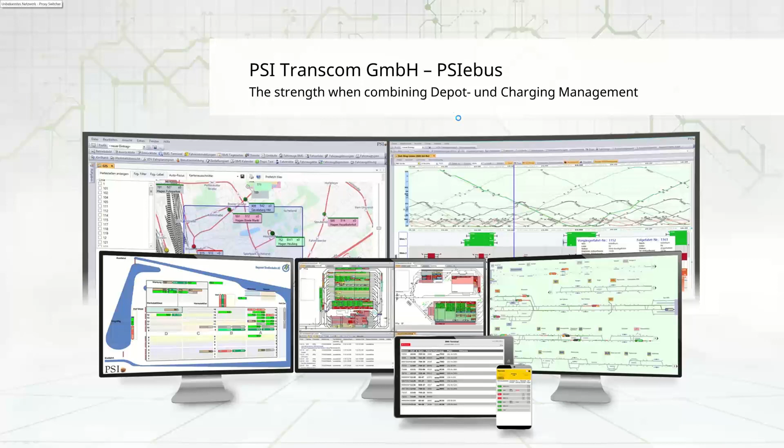Let me introduce our company. Our mother company is PSI Software AG, a large corporation with 2,000 employees around the world, doing 200 million euros in turnover. We are listed on the German stock exchange, with offices all around the world. PSI Software mainly does control software for all kinds of industries. PSI is active in the mining industry, in managing gas, oil, and water networks, in the logistics industry, and in the automotive industry, so there are several applications using PSI software.

So what are we doing? We have our unique software platform called PSI Traffic. PSI Traffic is a modular software that has a lot of applications and can be configured just according to your needs.

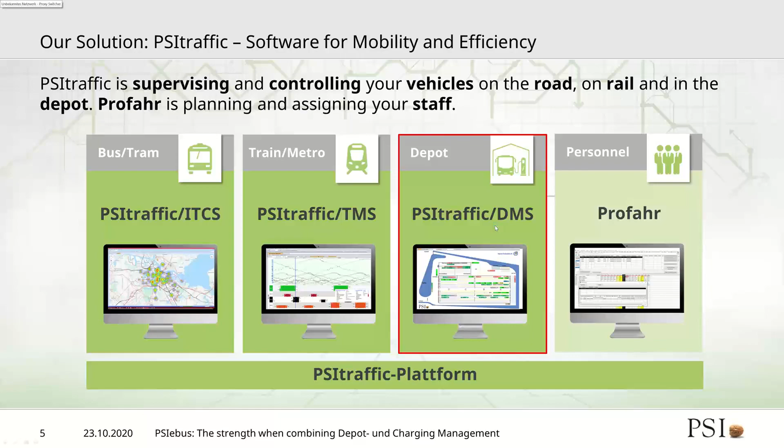So a depot management system - why should you think about one? When I was traveling around and having meetings with several customers, I noticed these wonderful applications, and all of the customers were telling me, hey Eric, we already have a depot management system. So I'm quite confident you will recognize these nice tools, which could be called a DMS.

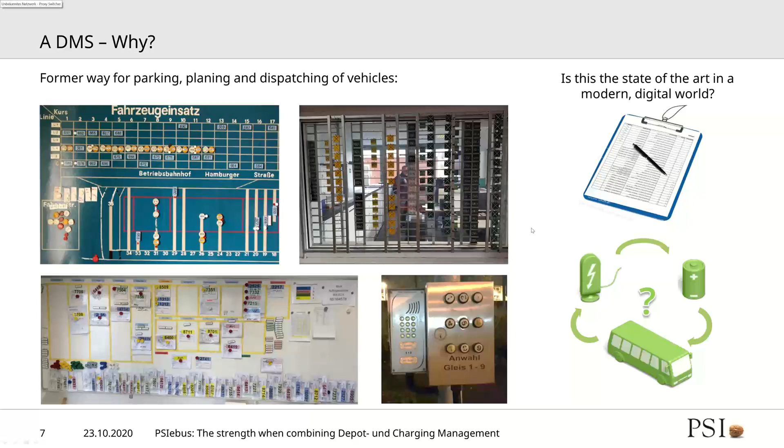One customer was also proud of having a three-dimensional DMS like these magnetic flip charts, but is this state of the art in a modern digital world? And furthermore, how does this cope with electrical buses when you have to consider state of charging and different constraints of these new technologies? So I think you'll agree with me that this is reason enough to think about a modern IT tool which will support you better in your operation.

But a depot management system is not only dedicated for electrical buses. It has several more applications to support and manage your depot operations already right now.

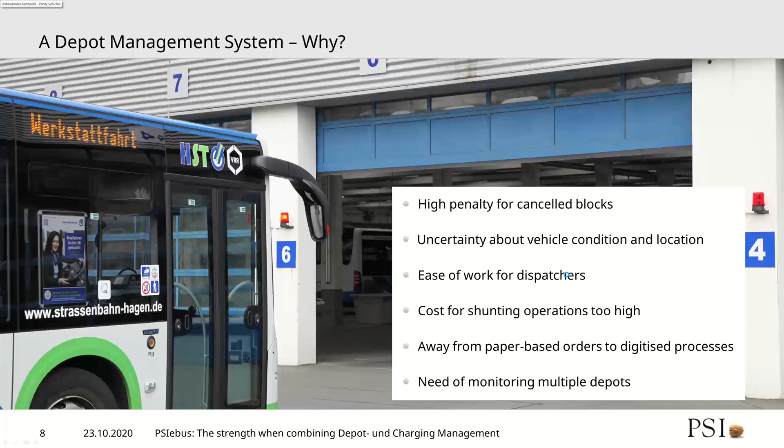So when you have a lot of constraints or problems managing your depot operation - for example too much shunting, too much paperwork, having to monitor multiple depots, or even high penalties paid when blocks are cancelled. If you need more transparency and flexibility across all your depot processes, or maybe you have a shortage of resources - all these questions lead you to the answer: you might think about a depot management system, which could help you become more efficient and better with your depot operations.

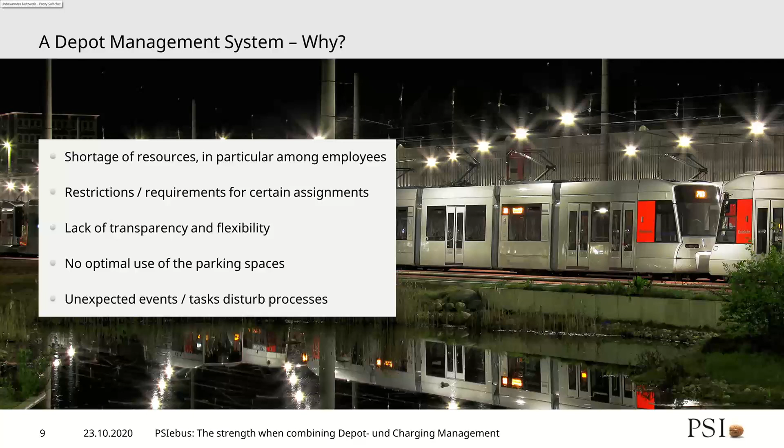How can we do it? So what are the modules and functionalities of a depot management system? The depot management system covers all the processes and all the functionalities you have in your depot.

So the DMS starts to track and recognize the vehicle when it's entering the depot. We start with vehicle identification, the assignment of parking lots. We manage workshop and resupply processes. Definitely the heart of the software is the allocation to blocks, so the dispatching. We have quality management, to report statistics etc. We inform the driver. We include the charging management, which I'll talk about later on. And our software is cloud capable, so it's up to you whether it runs on premise or in the cloud - both ways are possible.

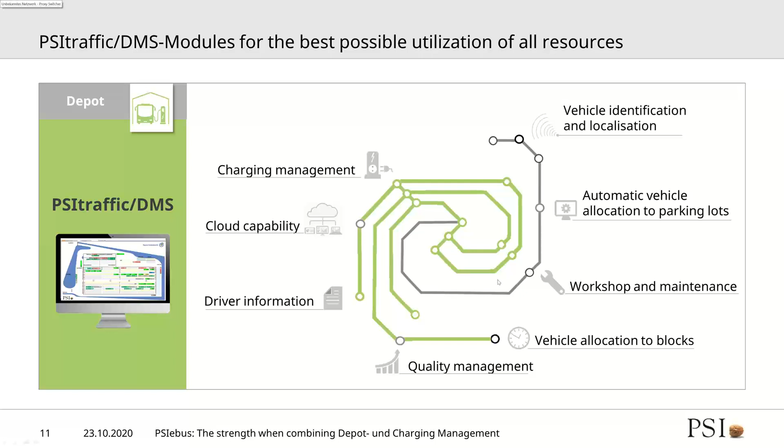Starting with the first function or module of our DMS: vehicle identification. The vehicle identification can be done via various technologies. As a software company, we are open to using different hardware or other systems to fulfill these functionalities. The idea with a vehicle identification system is to have precise and exact information about which vehicle is approaching the depot and where vehicles are parked.

Furthermore, we can use this technology for data communication with the buses - to download diagnostic information from the bus, and to control or trigger preconditioning, meaning switching on the heating or cooling systems automatically. It also helps you have a graphic overview of all the vehicles, broadcasted to all your users. On the bottom right, you see an example we analyzed together with a customer - the advantages of using a positioning system to get a more precise overview of where your vehicles are parked in your yard.

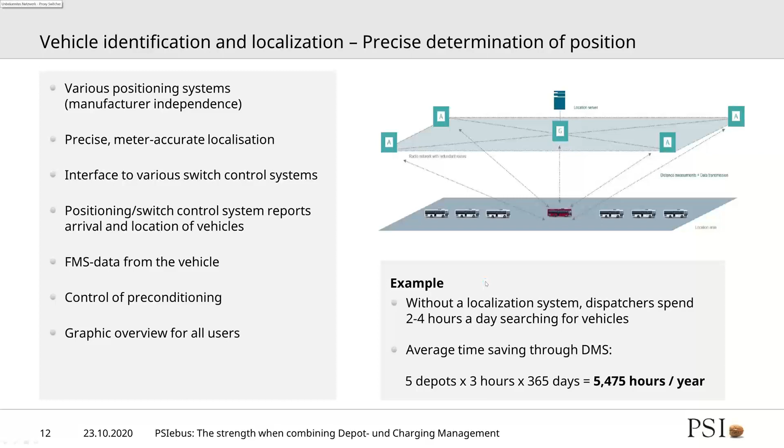So when we know the vehicle which is approaching the depot and we have recognized the number of the bus, our system starts the logic in order to assign the right parking lot to the vehicle, which means for the electrical buses also to decide which charging station this bus should use.

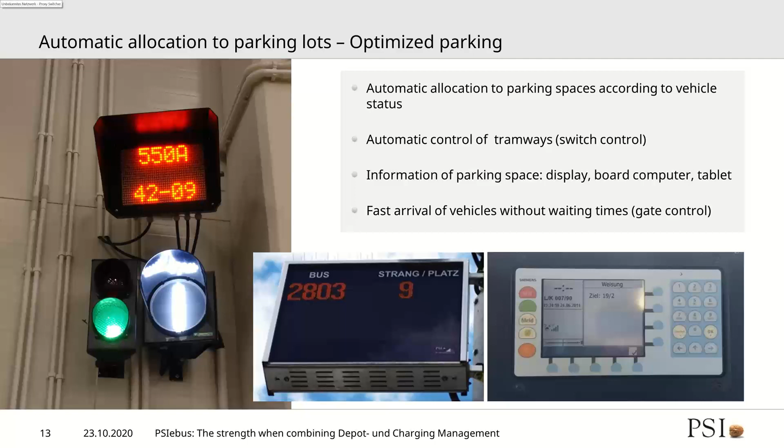There are different technologies to inform the driver about its parking position. We can use exterior displays like this, or if we have communication to the HMI of the driver, we can display it there to show the driver, okay, you have to park your bus on spot number 9. This enables the bus driver to directly enter the depot. There's no need to wait at the gate to do checks with managers. The driver automatically knows where he should park the vehicle best.

The next functionality or module of our software is the integration of workshop tasks. This helps you have efficient planning of the operation. If you have a complete overview in the DMS of the cycle-based upcoming checkups of your vehicles, and an import of the reported failures and defects of the vehicle, it helps you and your workshop staff have a clear overview about which vehicle has which defect, where the vehicle is parked.

Furthermore, the dispatcher will know which vehicle is down for workshop repairs and not available for dispatching. By integrating these functionalities together, both sides, dispatching and workshop, have the same overview, the same information out of the system, knowing which vehicle is available or which vehicle is down due to defects.

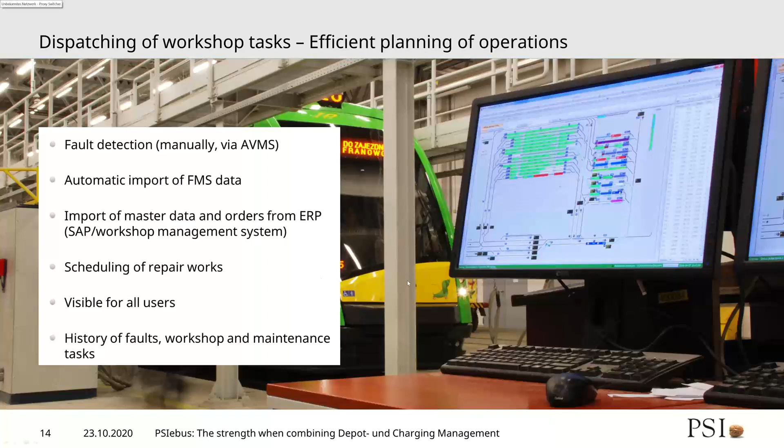So what we are doing with maintenance and repair tasks, we do the same with all resupply tasks. We have software logic implemented to optimize the refueling schemes of your buses. When we consider the current tank status of the vehicles, we can assign vehicles best to the next block.

So in order to find a logic where there's no need to refuel each bus every day, the system can help you refuel buses maybe only every second or every third day. Furthermore, we can establish interfaces to the charge management, and provide special terminals to manage the resupply tasks done by your service staff, etc.

And when you know already in advance in your system that a vehicle needs cleaning, refueling, etc., these tasks can be marked so the dispatcher knows when a vehicle is not available for the next block because intensive cleaning or washing is necessary, and the vehicle won't be available for the next hours.

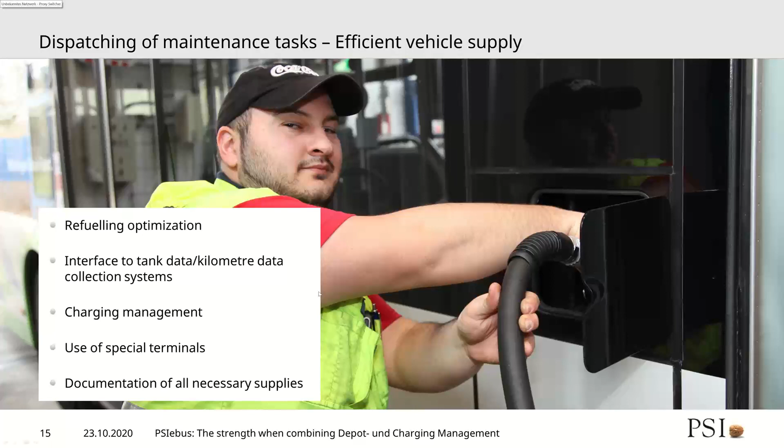As I mentioned at the beginning, the central or core functionality of our software is definitely the dispatching, meaning the automatic block assignment. Our system uses the Qualicision optimization kernel with artificial intelligence, which is a unique software kernel used by all PSI software. This software has the strength to consider a lot of criteria and a lot of constraints.

It can do a multi-criterial optimization to find the solution. The logic is fast, so it will always find a solution within seconds. There's no need to wait minutes or hours for a new dispatching result. It comes quickly out of the system whenever you trigger it.

The system is prepared to do all these things fully automatically, in order to support the dispatcher best and make their work much easier, just by helping with automatic redispatching, in case there are some cases that cause interruptions to your operation.

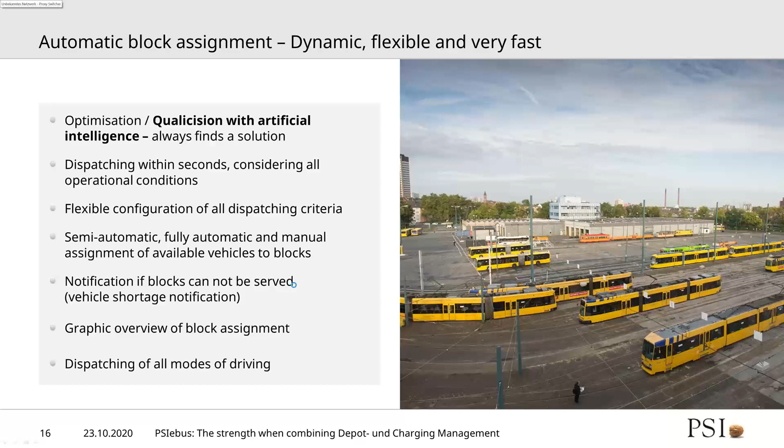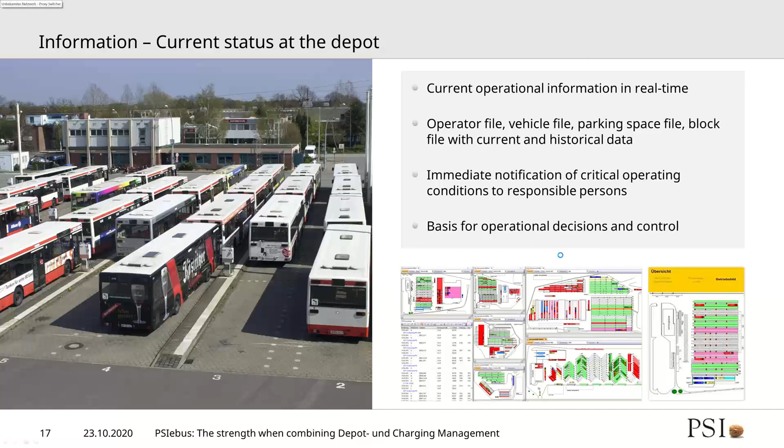Finally, when we have all this information in our system, the most important part is to inform the drivers. So we have a driver information screen, which can be shown on a normal TFT screen, or you could use it in our app on a tablet or mobile phone.

The idea is to inform the driver when he or she signs in, so the driver gets information: what is the trip I'm assigned to? When do I have to leave the depot? What is the assigned trip number I have to do? What is my duty? Where do I have to drive to? And especially, which vehicle have I to take?

Which vehicle was dispatched by the system automatically to me, and where is the vehicle parked? So the driver has all the information he needs when signing in with his duty and can immediately go to the noted spot, pick up the vehicle, and start his journey quickly and easily.

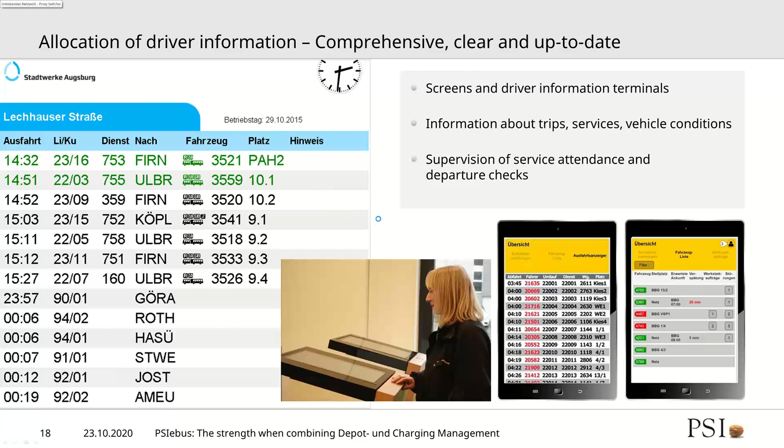So how can our system integrate with your existing and current IT landscape? Our strength is that we create interfaces to all your existing systems, so there's no need to replace all your IT infrastructure with a PSI software.

Our approach is that we integrate and create the necessary interfaces in order to make the best out of your existing system. So it's definitely the planning systems for the timetable and duty rostering. We could have interfaces to different ERP systems, AVL systems, gate control systems, and so on. It's project dependent which interfaces make sense and which systems you might have in use already.

Finally, what are the benefits of using a DMS? It definitely helps you to increase vehicle availability, have transparency of all the processes and transparency to all the users using the system, and cut down the costs of fueling processes, reserve vehicles, etc. So finally, it optimizes the full management of your depot operation.

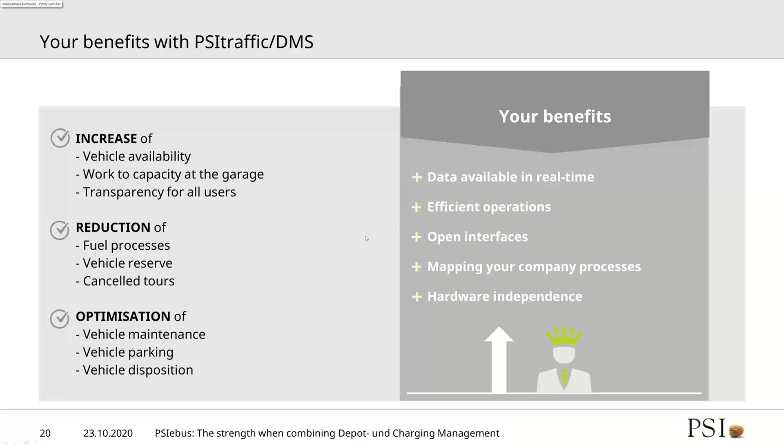Continuing with our upgrade of this solution towards electrical buses and electrical mobility, let's talk about our PSI eBus solution, which includes the charging management as well.

When talking about the combination of depot and charging management, I can talk about a very good reference we already have in place. We have realized, together with the operator in Hamburg, a large city in Germany—the operator is called Hamburger Hochbahn and is a long-standing customer to us—with intensive workshops, a pilot project to set up a full depot management system with a charging management system.

We combined it into one solution, and the system is running. It's been running in Hamburg now for almost 2 years. This is evidence that the things I'm talking about are not just an idea or theory, but practically already live in place.

So what was the starting point to start this discussion with Hamburg? It was a clear mission and strategy set by the mayor of Hamburg that as of 2020, Hamburg will procure only emission-free buses. This was a clear message from the politicians, which had to be realized by the transport operator Hochbahn. It was a huge challenge to have a mixed fleet moving away from just diesel vehicles.

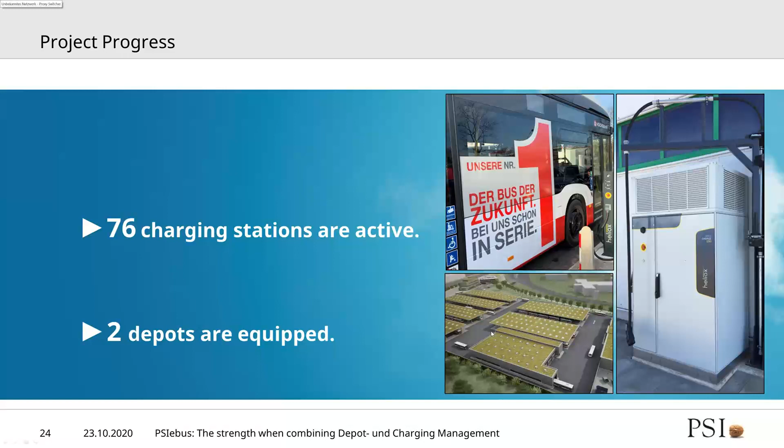At the moment, 76 charging stations are active, and 2 depots are equipped. Hamburg built a totally new depot, which you can see here—a brand new depot opened last year, dedicated only to electrical buses. You see different carports, and it's designed to house up to 240 electrical buses.

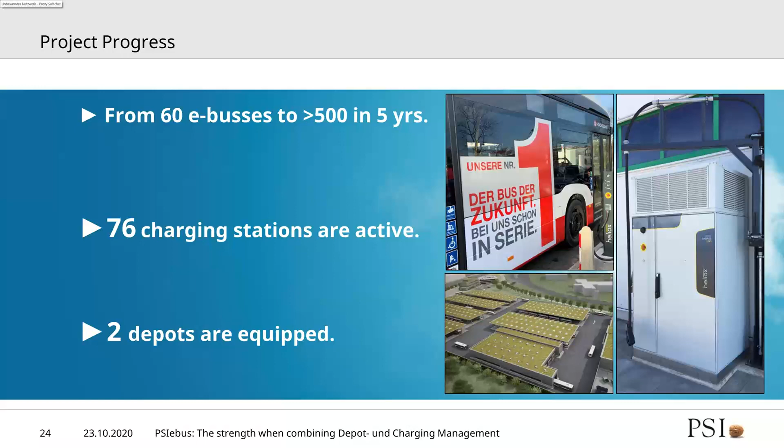Currently, Hamburg is operating 60 electrical buses. 500 are already procured and will be put into service within the next 5 years, and the remaining 500 vehicles will follow in the 5 years afterwards.

So what are the challenges when you are transforming your fleet from diesel buses to electric buses? I think the biggest challenge is the reduced range and mileage an electrical bus can drive.

Furthermore, you have to think about the management or a different organization of all your depot processes. In a diesel depot, the refueling and servicing is done at a point separate from the parking point. In an electrical depot, you have the resupply—meaning the charging—at the place where the bus is parked.

You have to think about how to park and assign the vehicle to the charging stations already when they're driving into the depot, because there's no need to move them around afterwards just for refueling, since they are standing at the charging station for hours.

Furthermore, charging takes a long time. Charging a bus takes more than 2 or 4 hours, depending on your chargers. You have to consider this significant time to refuel your buses. A diesel bus could be refueled within 5 to 10 minutes, the tank is full and the bus can start its journey. But this is not applicable anymore for electrical buses.

So what are the additional challenges when introducing electrical buses? You have to build up the charging infrastructure at the depot, which means some significant and severe construction works need to be undertaken.

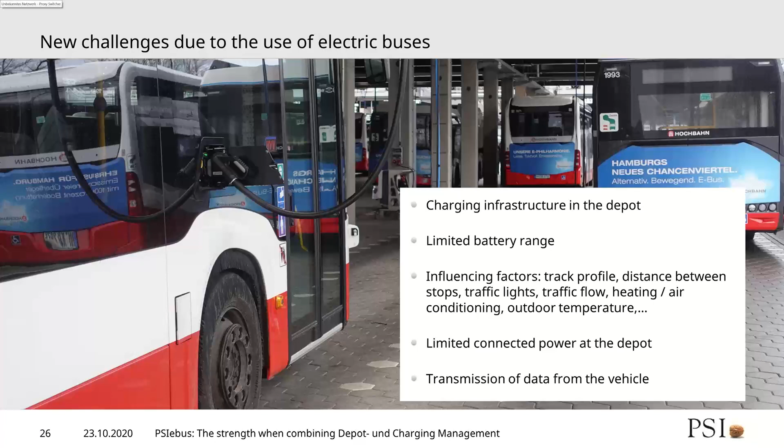So how is our PSI eBus solution working? We have two parts of the software. I start with the left part, which is the DMS. The DMS is continuously checking the status of the batteries, and it already considers all the necessary information to do automatic block dispatching and planning as described before.

The DMS is responsible for placing the vehicle at the right charging station, so it is responsible for parking management. It utilizes the charging stations best, with the necessary information needed when planning the parking and dispatching of the vehicle. Furthermore, the DMS triggers the preconditioning, meaning it can switch on the heating and cooling system of the buses fully automatically.

The DMS has an online interface to the smart charging system, which is a charge management system. The charging management system takes care of all the aspects coming from the electrical side, coming from the grid. It makes a forecast of the daily energy demand and considers constraints coming from the grid in order to best utilize your energy supply to charge the buses.

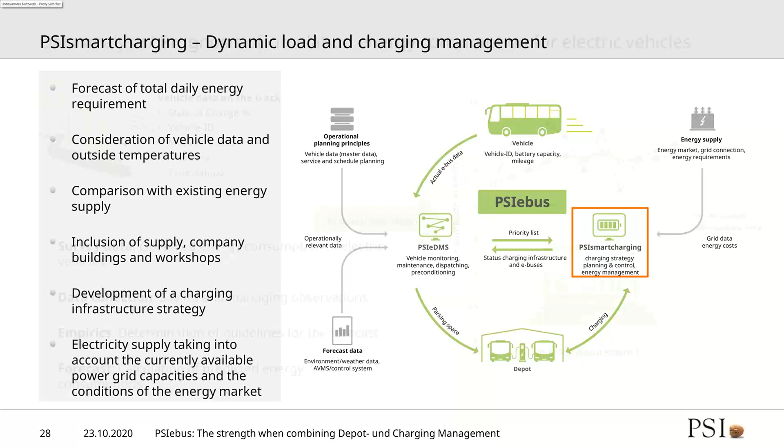I already mentioned there is a big need of data when managing the charging. Why is it so important to have a lot of data in our system? The idea behind it is that our dispatching algorithm is an artificial intelligence based optimization kernel, and it can predict the energy consumption of a bus. So we need data to take into account when predicting how much energy a bus will need for the next trip.

This is very important and helpful when you want to utilize your fleet best and make the most out of the electrical buses, knowing that if you use this bus on this trip with this outside temperature and these driving conditions, you get a forecast from the system of how much energy the bus will need. The charging management system will adjust the charging independently based on the forecast the DMS has done, so that the buses are charged only up to the amount of energy really needed for the next trip the bus will be assigned to.

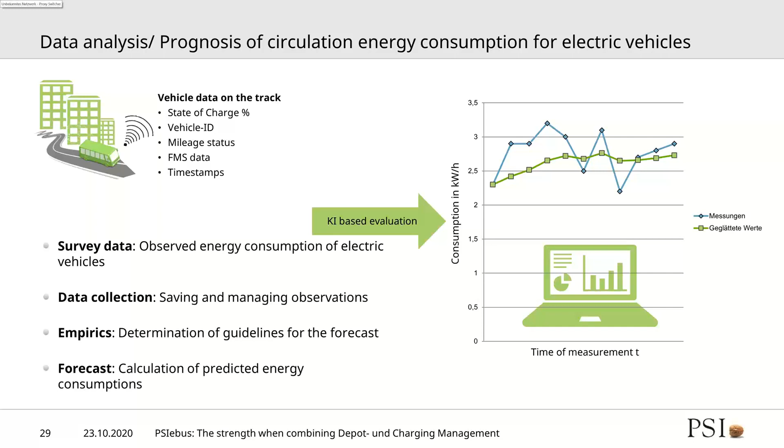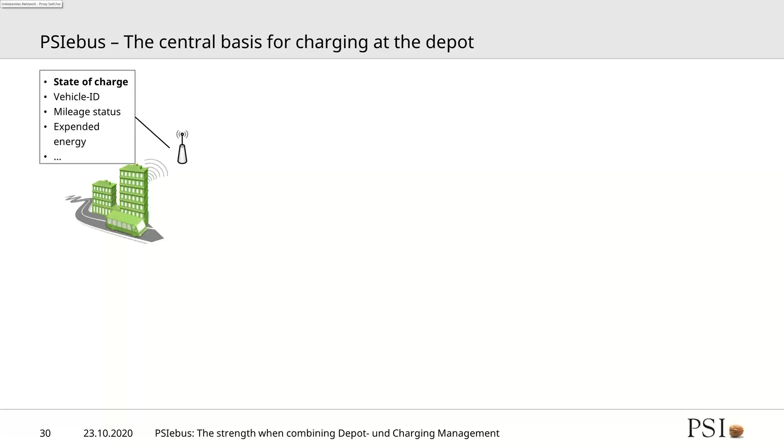So how is our PSI eBus system working? Assuming a bus is coming back from its journey, driving back to the depot, sending the needed data like state of charge somehow to a server. The DMS will have access to the server and will have the needed vehicle master data, so we know which is the manufacturer of the bus, how old it is, what type of battery it has, meaning what is the capacity of the battery, etc.

Furthermore, the DMS knows all the available blocks, meaning which trip has been served by the bus and what potential blocks the bus could be assigned to.

So taking this information into account, and having information about what is going on in the depot - is there a free charging station, and what type of chargers do you have. You could have slow chargers or fast charging stations. The DMS takes into account what charging station is available in order to make the selection and the parking assignment of the bus, informing the driver where to park and at which charging station.

Then the DMS creates a charging plan. You can call it also a charging strategy or a list of priority - which buses need to be charged first, or in which order the buses need to be charged, what is the needed energy demand of the buses, etc.

All this is transferred via an online interface to the smart charging system. The smart charging system observes the grid - knowing the available amount of energy at the grid, the cost of the energy, and other restrictions. We could have interfaces to your transformers on your depot to consider what amount of energy is really available.

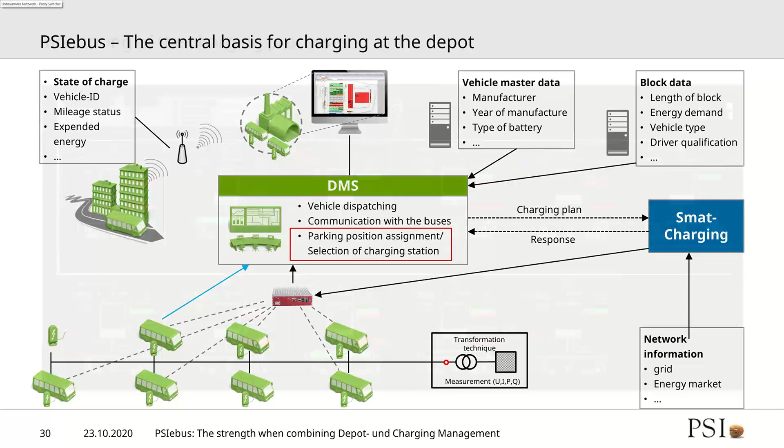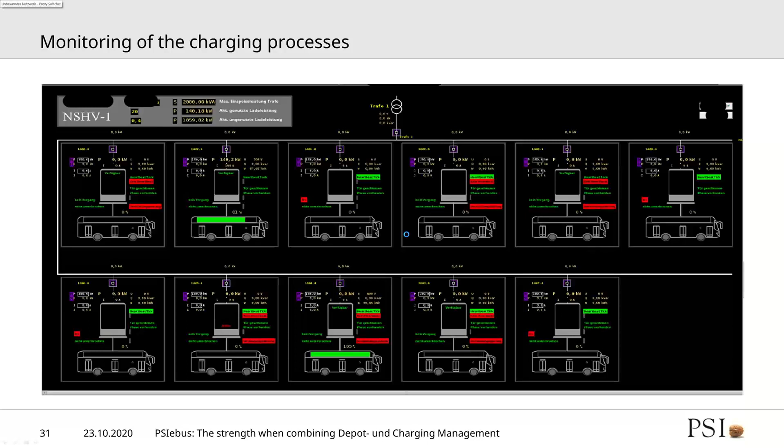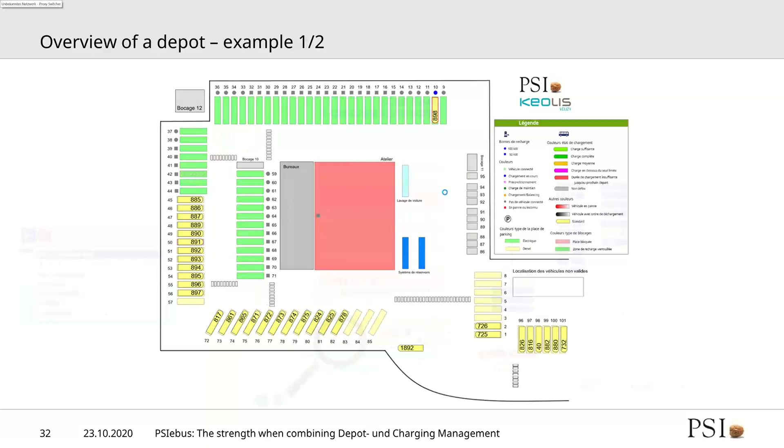Another, much more simple overview is the one we are using at Keolis in Paris, where you have a colorful overview of the depot, and the colors indicate the status and the ongoing charging process of the buses. Another example, taken from our project in Hamburg, gives you a much more detailed overview about each bus and charging station, so you could see what is going on with the dedicated charging station, what the process is, etc.

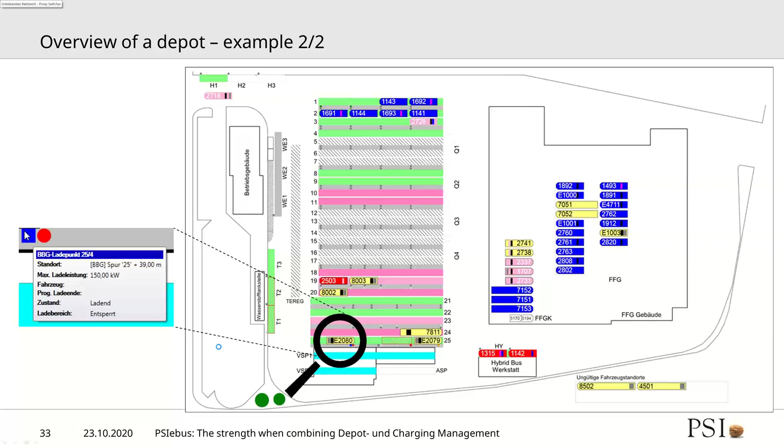So what are the key learnings we have taken from our already realized projects? Depot management systems definitely help you cut down operating costs for all types of buses. Our DMS is designed for multiple fleets with different propulsion systems - it's not only dedicated for diesel buses or electrical buses. We have a lot of customers using other buses with other propulsion systems, like fuel cells, hydrogen, hybrid buses, etc.

So all kinds of different buses could be incorporated into our system. Furthermore, our software is definitely independent from all hardware suppliers. We have done different checkups and have checked our interoperability with different bus manufacturers, with different charging station manufacturers, so that you can use our software with different types of hardware.

I hope I've done a good presentation to highlight the advantages when you combine the depot and the charging management system together in one system. The advantage is that charging management system and the dispatching need to be combined in one system, so that you could react on both sides, whether something changed operationally or in the charging process, so the system can react on both incoming factors immediately and hopefully automatically.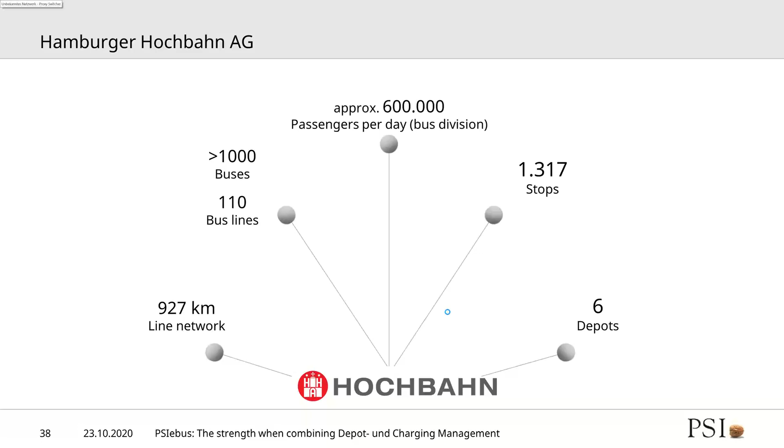They have 6 depots right now, a 7th depot is already in planning, and they are already considering building an 8th depot. Our system has been running there now for 8 years and will continue to grow for the next years. So all the functionalities I was talking about over the last slides are already in place, fully functioning, and in use by our customer in Hamburg.

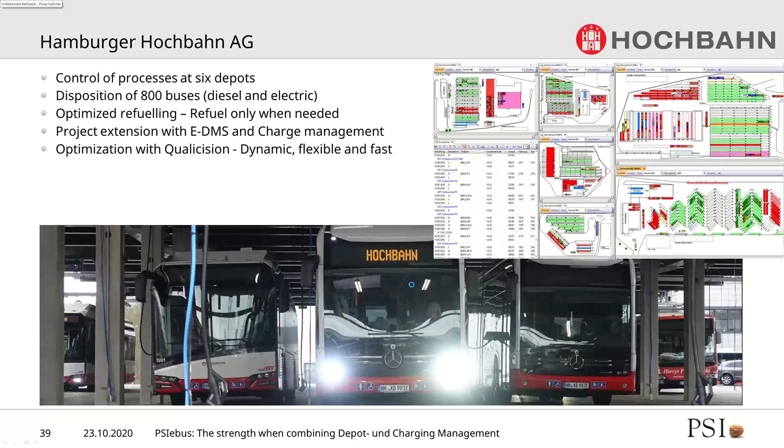Also, we have, just as an example, GVB, which is a big public transport operator in Amsterdam in the Netherlands. They have a big fleet of buses and trams, so our system is capable of managing all types of fleets - regardless if you have buses, trams, or metros, it doesn't matter, we can combine all these different types of vehicles in one system.

And in Amsterdam, we don't have only buses and trams, we also have some ferries, and the metros are observed in our system too. So here in Amsterdam, we have realized a combined system of the AVL and the DMS system. This underlines that our modular system can be adjusted towards the needs of the customer and can grow over time.

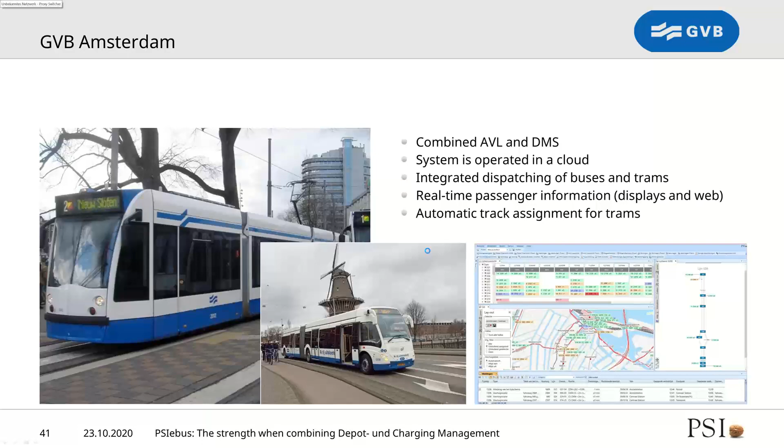So just to give you some testimonials about the happy customers in Hamburg who are using our system. The bus driver is definitely happy and proud that the system ensures he knows where the vehicles are parked, that everything is perfectly cleaned and maintained, so he will always enter a clean bus which is preheated and he can easily and conveniently start his journey.

So I have a technical problem to move over to the next slide. I'm sorry. What is the reason? I don't know. Okay, sorry for that, let's continue.

The dispatcher definitely is happy that he has experienced that by using our DMS, his daily work becomes much easier. So he has much more time to serve the drivers, to help the passengers, because all the dispatching work is done automatically by the system.

The employee from the supply task is happy about using our system because he knows in advance which vehicle is approaching, what tasks he has to do, and he only needs to refuel the buses when it is needed. That definitely saves a lot of time for him.

Talking also about the workshop manager, he definitely is happy that with the interface and using our DMS, he can react quickly to malfunctions reported by the system, so he knows in advance when the vehicle will approach the workshop, what the next tasks are, and that he can report immediately back to the dispatcher which task has been fulfilled and what the current status of the vehicle is. And finally, the vehicles are only in the workshop as long as they need to be there.

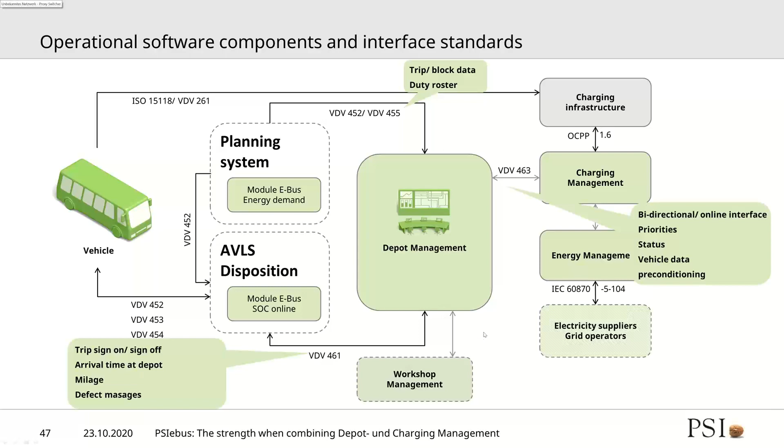Okay, that's a wonderful and very technically detailed question, but I'd like to answer it briefly with the next slide. As I've mentioned, there are different communication ways. We trust and rely on the ISO 15118 protocol as communication between the buses and the charger. Then there is the OCPP 1.6 protocol, which is the connection between the chargers and our gateway.

Our gateway uses the communication towards some cloud operation from your charging management, from your chargers, if there is a cloud that some chargers provide. But furthermore, we have significant and important interfaces to the grid supplier, so that we can connect to your transformers, and finally connect these systems with the charging management.

Additionally, our system is prepared to trigger the preheating, meaning the preconditioning in the vehicles. For this we have a different communication done via the VDV 261 protocol, which is a German standard, but hopefully it will become much more popular around the world because it's the first time this interface was standardized for this kind of communication.

That's a perfect answer. Let's move to the next question. So there are three questions combined together.

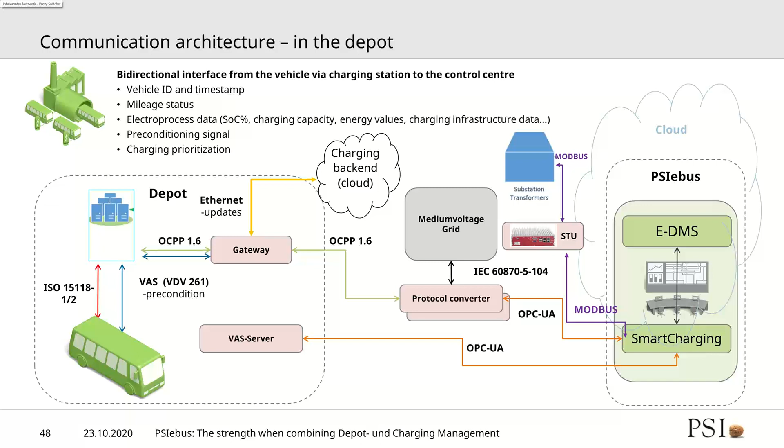The first thing is how to cope with summer temperatures during charging. This is of course a very relevant question in the Indian context as well, because the temperature gets really extreme during summers, like 48 degrees.

Then the next part of the question is how to ensure scheduled opportunity charging. And again, that person asks how to automate and confirm that the buses go out for a trip in a proper, clean and healthy state. So shooting all three questions to you all at once.

Over to you. Yes, let me try to remember all of them. Let's just start with the preconditioning, the preheating. So I already jumped back to this slide when I mentioned that the DMS was responsible to consider all this information.

So the DMS has an interface, for example, to a weather forecast station, so that we take into account outside temperature. We have the interface to the charging station in order to measure the current temperature on site to manage the charging.

And furthermore, the system is prepared to trigger the preconditioning, meaning our system switches on the preheating or cooling system of the bus just in time, depending on when the trip starts. So there was a next question about the opportunity charging.

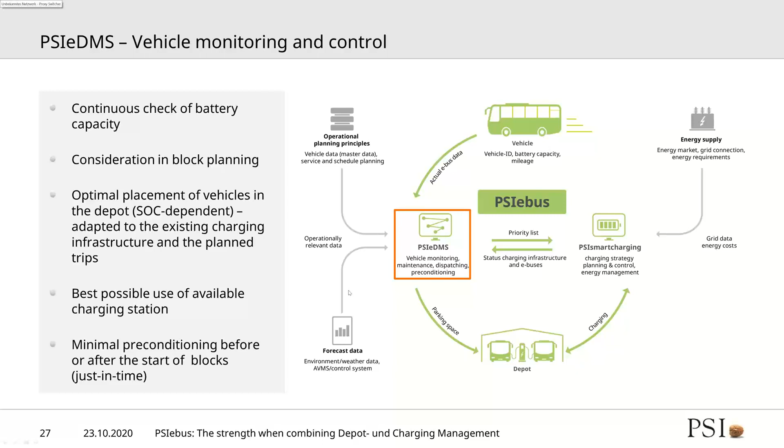Just let me go this way. There was a question about how to incorporate opportunity charging along the journey. So as I've mentioned, our software...

...consists of two modules. The depot management system, in our opinion, is responsible for all the tasks at the depot, and it's up to the AVL system to monitor the buses when they are in service. That means the AVL system takes care of the ongoing charging processes when you use opportunity charging along the track.

Our AVL system monitors this so that the dispatcher gets warning messages if a bus misses a charging station, if the charging process fails, etc.

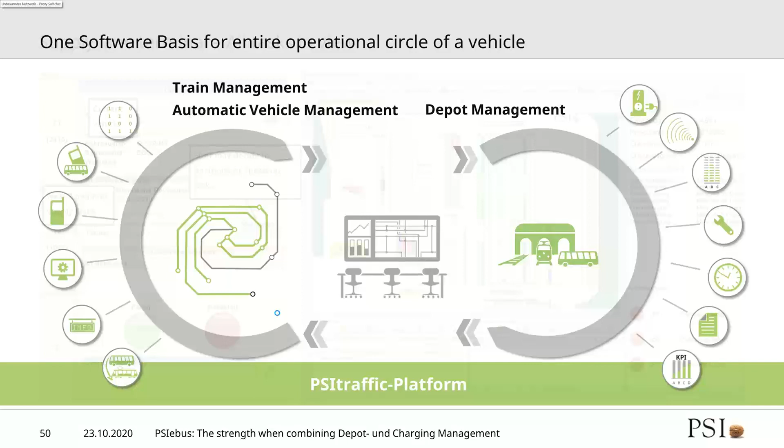So there was another question about how we can ensure that each resupply task has been performed. The idea is that we could provide some terminals for your resupply tasks.

It could be a terminal, but it could also be an app used on a tablet, so that the supply task staff confirm which job has been done, and which vehicle was served, so that the dispatcher knows and sees in the system that all tasks have been performed.

Furthermore, our system can create a separate list or make a selection of several vehicles as a suggestion for a foreman to do a double check, to ensure that the supply staff has performed the job. Then you have a double check that can also be transferred into the system, so the dispatcher always knows the vehicles are well maintained and in good condition to do the service.

Thank you, Eric, that was very beautifully explained. That brings us to the next question, which is: what are the key performance indicators for depot-based charging, or benchmarks for effective operations?

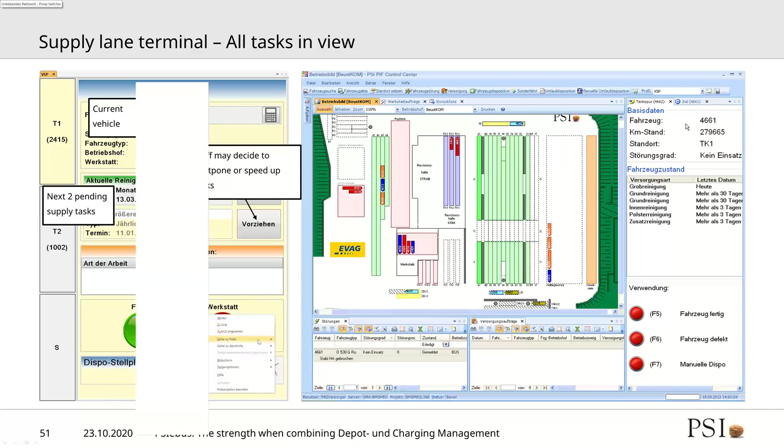Okay, yeah, another good question. Let me jump back to that slide.

Okay, thanks, Eric. That brings us to the last question. We still have time for another one, but let's see how this goes. The last question is how to manage on-the-run fleet and charging infrastructure integration.

Let me answer it with this slide. As I've said, our system is designed to cover all types of propulsion systems. So you will start with a significant fleet of diesel buses and introduce electrical buses step by step. Our system covers both types of buses, and the idea is that finally you have different types of buses in the system. When you start to dispatch the electrical buses to the blocks, I think it's a clever approach to consider the shortest trips you already have. When you look at your trips, you have maybe a range from 100 kilometers up to 400 or 500 kilometers a bus will drive a day, and I think you should start with the shorter trips and assign the electrical buses to those.